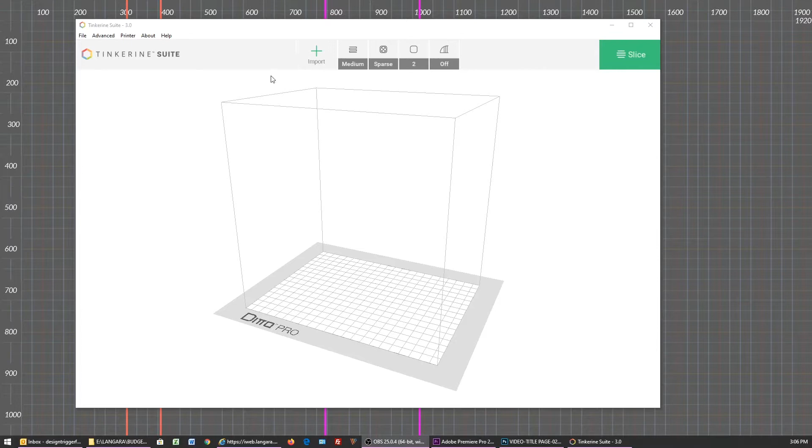So once you have your file, we want to open up the Tinkerine Suite. There's also a link below this video where you can get a free copy of this for your computer. And this is version 3. It's the latest version. So first of all, we want to go up here and click on Import.

Now, just a quick note here. If you're using an Apple Macintosh computer, the Tinkerine software has been known to crash when you're importing your STL file and also on the final slicing operation. If it does crash, don't be alarmed. Just reopen the Tinkerine software and import your STL again. However, if it does crash more than about 3 times, then there could be something wrong with your actual STL file and you may need to go back to the original program and review it.

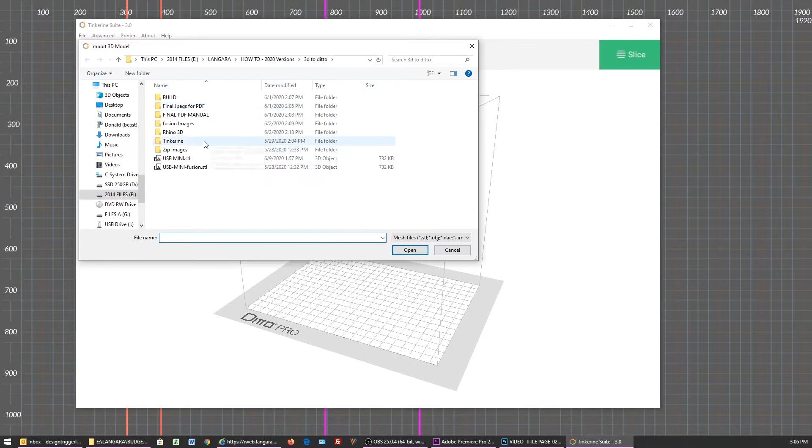So again, click on Import and we want to find your STL file. There's my USB mini, so I'm going to open that up. And there's the file there. And you can see we've got rings around this. When I roll over them, they change colors. Those are to rotate the object around, okay?

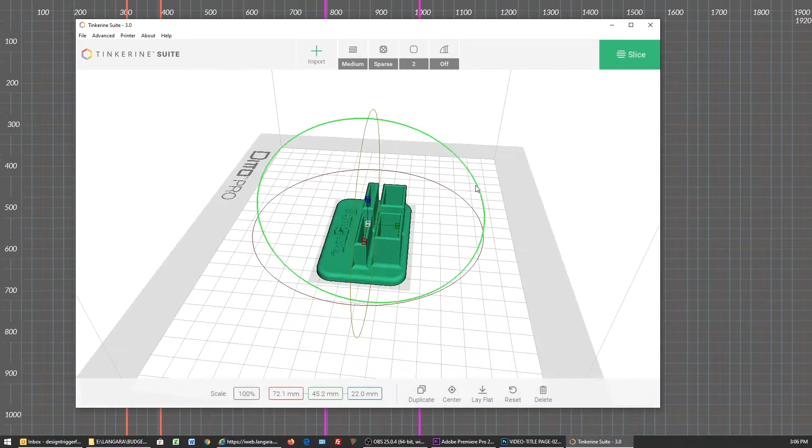Now saying that, if you click into a space not quite around the object and right click and then drag your mouse, you can fly around the object. The object's not moving, we're just flying around it, or the camera view of it, okay?

Now, if it is the wrong scale, you can go down here. I recommend building models in millimeters. That's what this program understands. If you've built it in something else, it may come in as the wrong scale, so you're going to have to change this. You can ask your instructor, you can go online for help, or you can actually email me if you want to, okay?

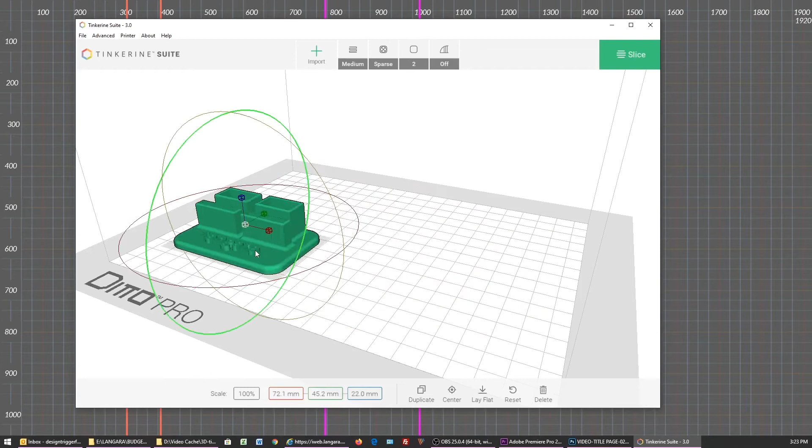Now there's a few other things here. You'll notice you have to be clicked on the object to see these. So you can also grab your object and you can move it along. By the way, you see how it's gray there? I'm out of the print area. Only when it's green am I good to go, okay?

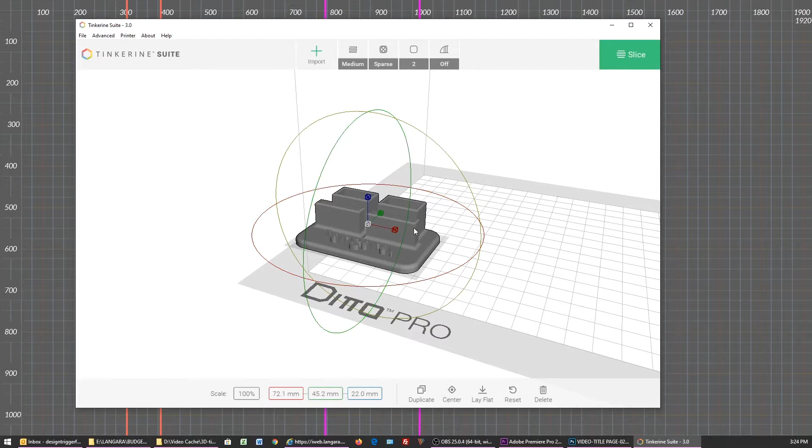So let's say I dragged it over here. I can go center. It's going to go back to the center. I can move it over to here, tilt it up a bit, and I can go reset, and it's going to go back to the last command I did. So remember, that's only to the last command.

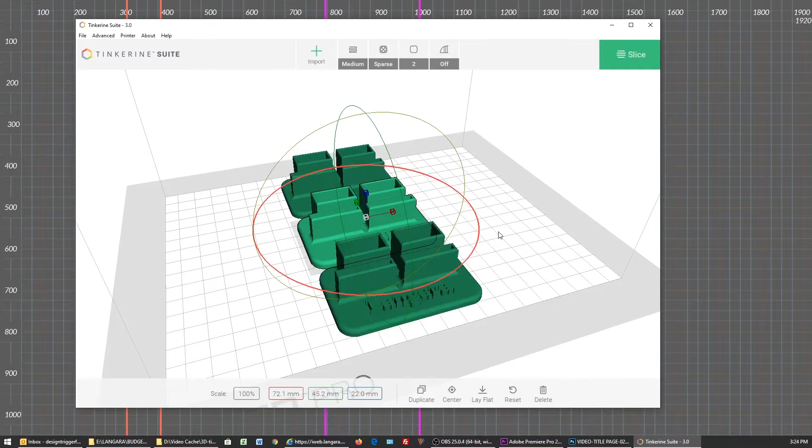Something you may want to do here is duplicate. So again, make sure you're on the object, hit duplicate. Now this is how many copies, not the total, but how many. So if I want 1 more, if I want 2 more, that's going to create them. And it usually lays them pretty close together, which you kind of want.

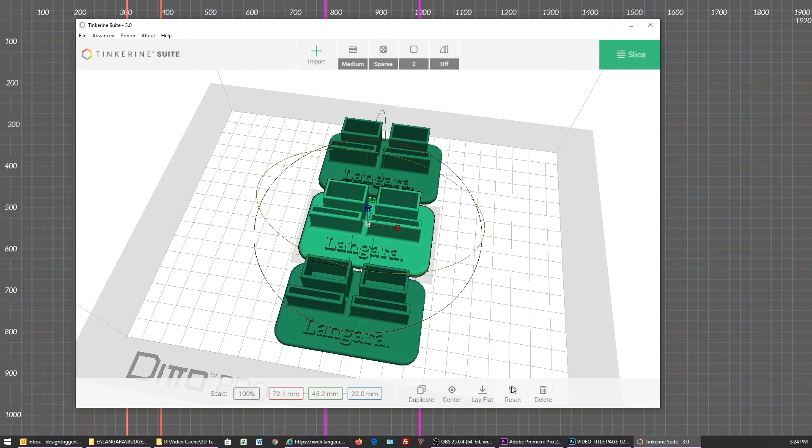Because you don't want the printer head to travel any more than it has to. So if I put one here and one over here, that's not good, because the print head has to travel all the way back and forth, which increases the print time, of course. See what happens when I hit reset here. It doesn't do much. If you want to delete any of those, just select it and hit delete. I'm just going to go center, and that's in the center again.

So right now I'm happy with this object. I'm not going to rotate it, but I'm going to talk about it later when we get into the supports down here. So for right now, this looks really good. The text is upright, it's grounded there, it's the right size.

The first setting up here is called the resolution. Now let's just click on that. So standard is usually medium, and I've printed a lot of things around Makerspace, and I find that medium resolution is always the best. I don't need high resolution. Why you may need high resolution: basically that's the amount of layers the print head's going to print.

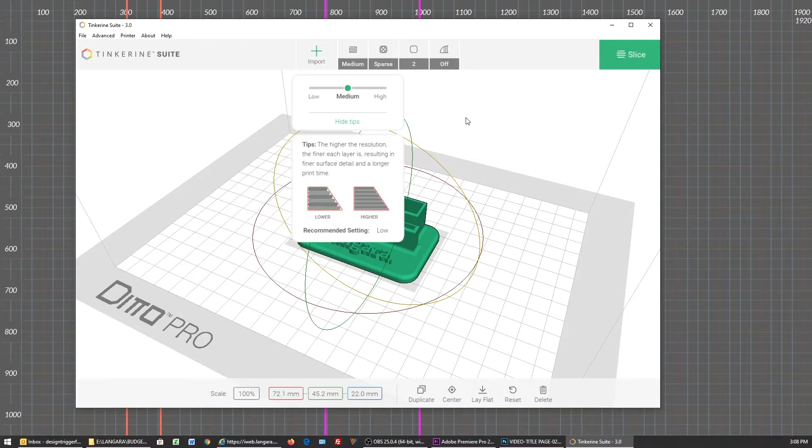So yes, it will come out a little more refined if you use high resolution. If your object's really detailed, or if there's really tiny details, then I would probably go to the high resolution. Keep in mind, if you go up higher, it's going to take longer to print. Again, I would usually leave it at medium resolution. The prints come out great at medium.

The next setting is the infill. Now the infill is the actual, so in this flat area here, it would look like this if you held a light up to it. So it's this grid that goes inside of this object to fill it up.

I would usually use sparse. Again, it's more than adequate. Dense, I would use it if your object is going to be under any stress at all. Keeping in mind, PLA plastic is pretty brittle as it is.

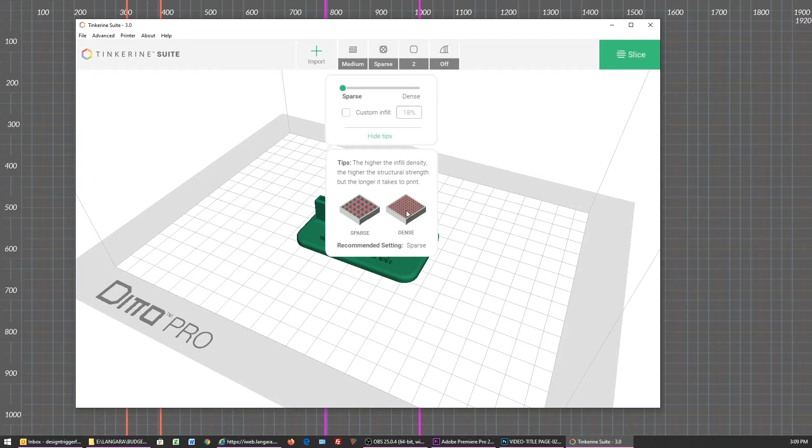But if you want to make it a little stronger, then you can go dense. Or if your object's very thin or something, you might want to use the dense setting for that. Okay, so usually I'd go medium, or I go sparse.

The next setting is the wall thickness. So you can see in this area here, this looks pretty thick. Well, this isn't the wall thickness. That's how I've built my object. So each side of that wall there would be like this. So I usually keep it at 2 walls.

Again, I don't think there's any reason to go up to 4 walls. Unless, let's say, you're doing a sphere without any filling on the inside, then yeah, you need some strength in the actual skin of the object, really. So I would only boost that up if you're doing something like that.

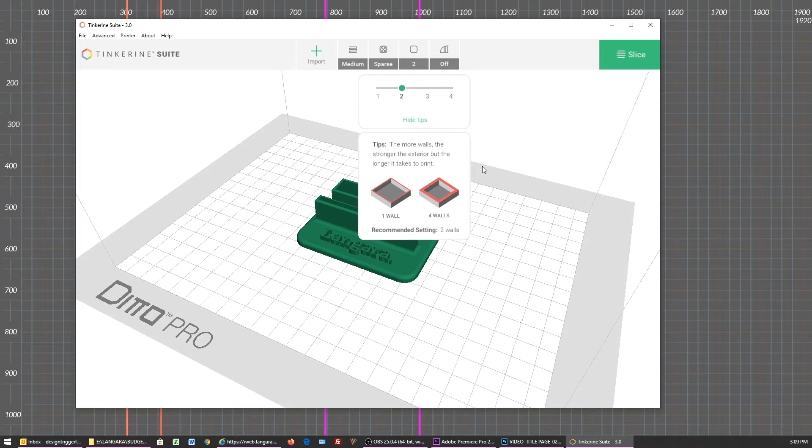And then the last setting here is the supports. Now, let's talk about supports here. So my go-to is usually: picture yourself standing upright, you probably don't need supports. Now stick one arm straight out. Now you need a support.

Think about supports as anything that's up in the air. So an overhang. The printer starts at the bottom and prints up. How is the printer going to print your arm if there's nothing there to print it on? And I'll give you an example of this. I'm going to rotate this up.

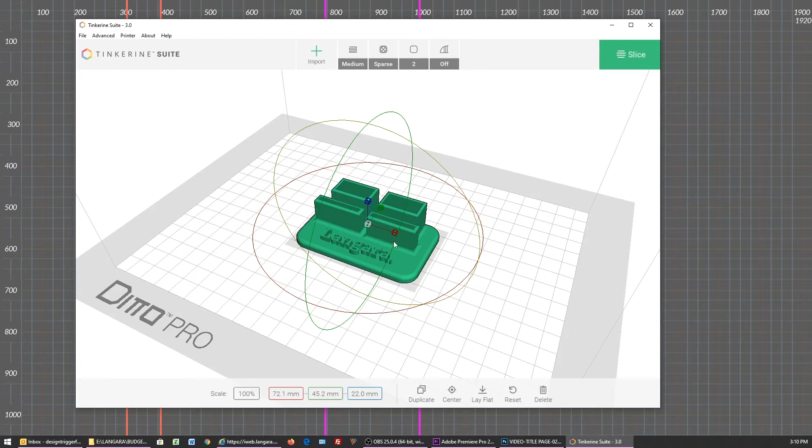Now, first of all, the best way to print text is upright like this. It comes out really nice. The worst print on this is going to be underneath the bottom, so keep that in mind. This doesn't need any supports right now. The text is going to print fine. Now I'm just going to rotate this up. If you hold Shift while you're doing this, it'll go in 45-degree increments. And now we're at 90.

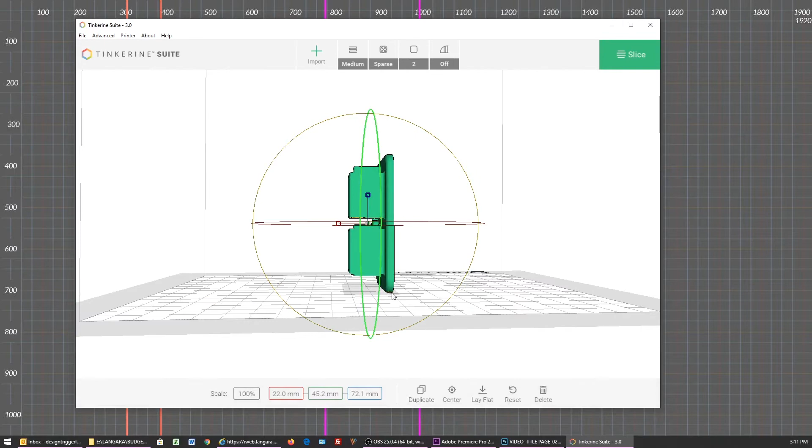It'll always bottom itself out to the bottom plane, so you don't have to worry about that. Okay, so now, as you can see, this is in the air. We need supports now, okay? And now those letters are going to need supports too. Let me see if I can zoom around so you can see. So each letter is going to have supports in between it just to be able to print that. So that print is not going to turn out very well.

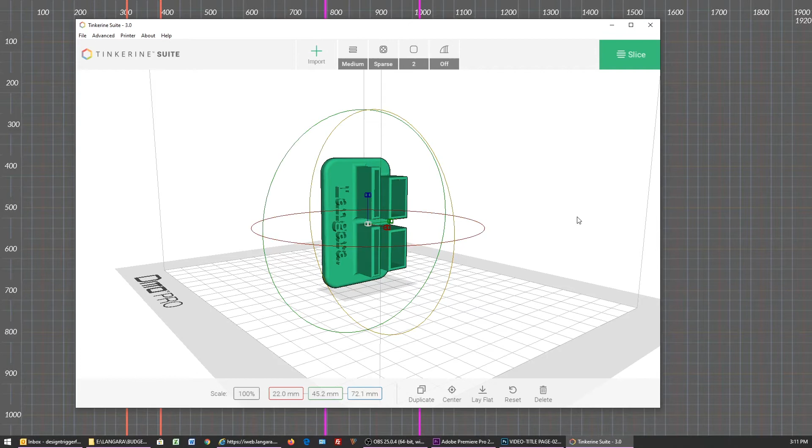Supports are a lot thinner PLA, but they do leave little nibs all over your objects. So you always try to avoid supports if you can. So that's also why maybe your object came in like this. You may want to rotate your object to a different orientation so it's going to print better or print without supports. So for supports, if you can print without them, great.

If I printed this without supports, though, the print would fail because it's got too much it would have to print in the air. So if you're going to use supports, I don't recommend exterior. I don't trust the algorithm in this program. Just go to full. Okay, so that's going to print full supports to be able to print those overhangs.

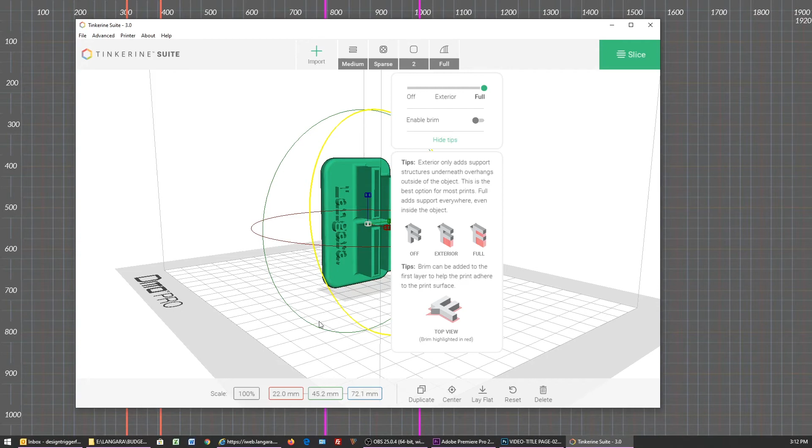Now the other thing is enable brim. Brim is just a layer that it prints out on the bottom. Right now, that object is a little slight on the bottom, so I probably would do a brim. If you're doing a sphere, which has very little contact, I would do a brim at the bottom. It just gives it a good foundation to print from.

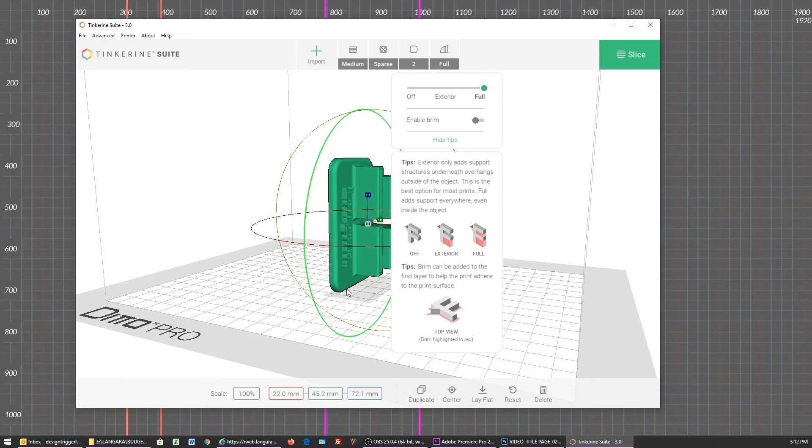Again, don't use the brim if you don't have to. When this is laying flat, it doesn't need a brim at all. So I'm going to put brim on. Going to put the supports on. And then the final stage in this is to go slice. So I'm just going to do that to show you what it looks like with supports here. So it's going to be generating the supports in gray.

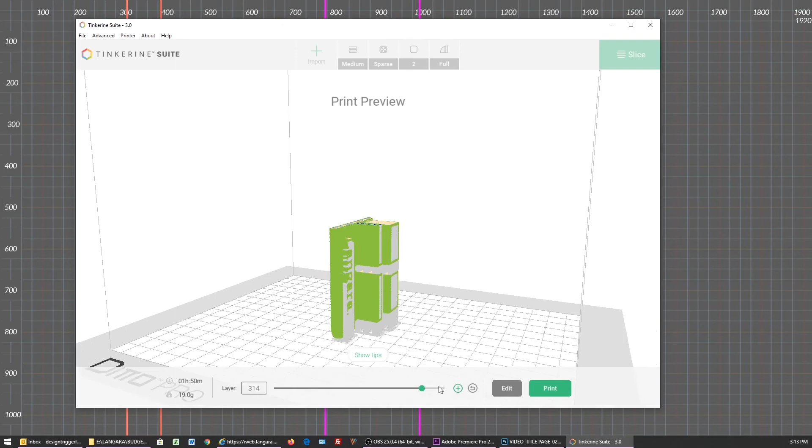And this is basically when it's slicing, it's creating the G-code for the printer. So now down here we can see it's going to be 1 hour and 50 minutes, and it's going to use 19 grams of PLA. And this is a slider to show you how it's actually going to be printed out. So these are all the slices basically. See, all that gray is the supports.

So now what you would do is go print, and that's going to allow you to save your file to the computer or your USB. But I want to edit this and show you the difference. That's 1 hour and 50 minutes. Let's go edit. I'm going to rotate that back down, holding Shift. This is going to print really well now.

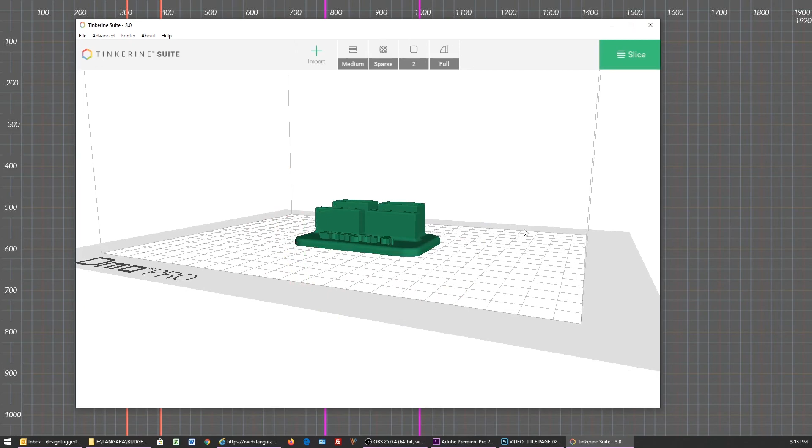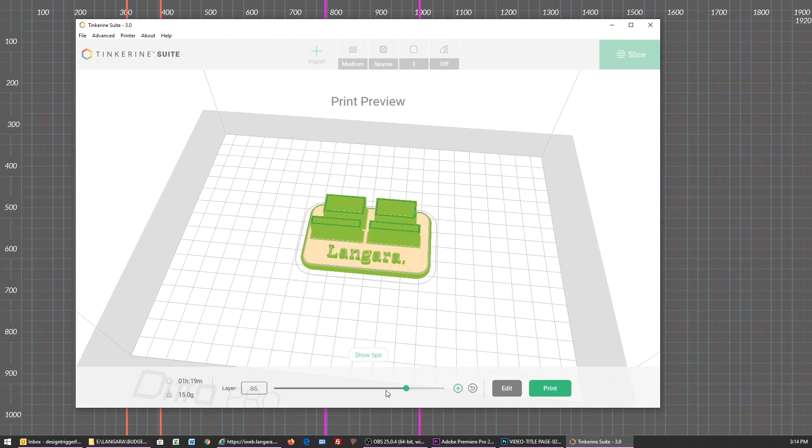I'm going to turn the supports off. I'm going to turn the brim off. And then I'm going to go slice. Now it doesn't have to generate any supports. And there we go. Now we're down from 1:50 to 1 hour 19, and 15 grams. And this will print much better. So we just go print again, save it to USB, save it to computer, wherever you need the file.

Now, if you are going to upload this for submission for Makerspace to output this for you, you will have to zip compress it. The instructions are in the first box on this page where you saw this video. It's under zip compression, and it tells you how to do that.